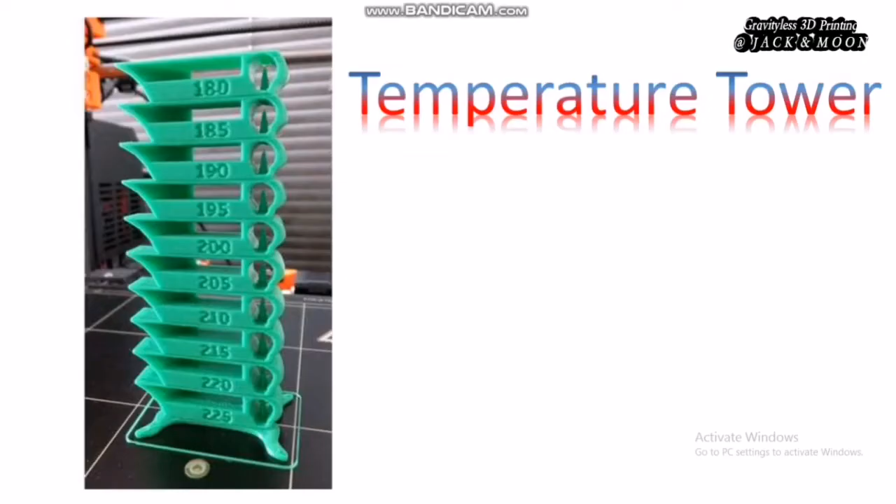In today's video, we are going to introduce this thing and show you how to print it on your own with the Cura slicer. This is a temperature tower which is designed for detecting the most suitable printing temperature for your filaments.

Normally, for every roll of filament that we bought, there will be a range of its suitable temperature written on the packaging label. Examples are PLA ranging from 190 degrees Celsius to 210 degrees Celsius and ABS ranging from 240 degrees Celsius to 270 degrees Celsius.

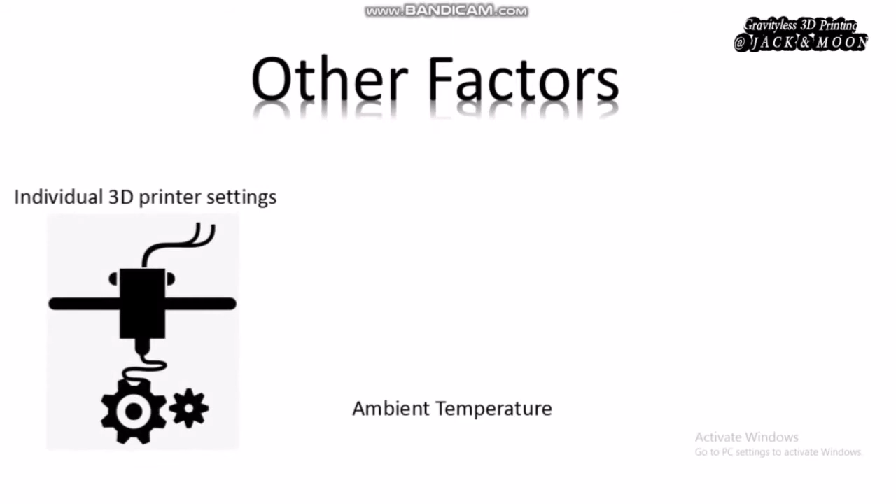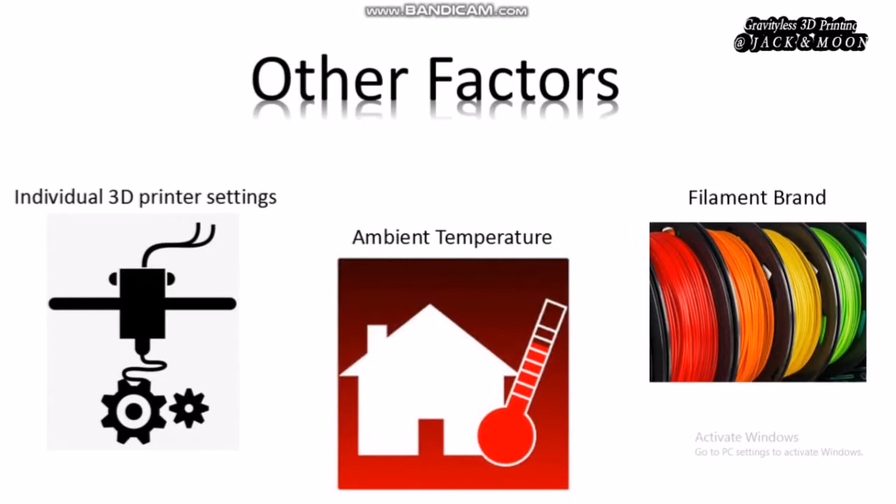Also, due to other reasons like individual 3D printer properties, environment, surroundings, and material qualities, the suitable temperature is not exactly the same for everyone. So, to find the exact value to be input to the slicer, we can use a single temperature tower for the testing instead of having to print multiple prints with different settings.

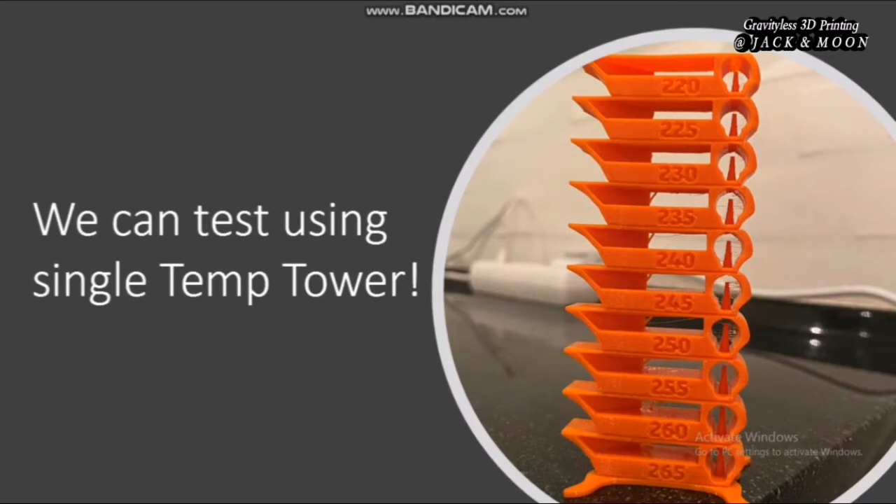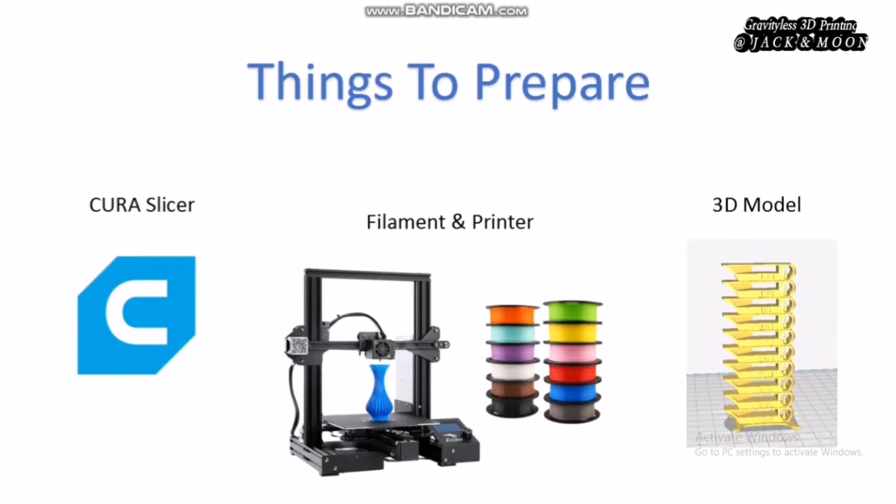Without further ado, let us look at the things you need for the testing. You will need a Cura slicer, a filament to be tested, a 3D printer, as well as the model of the temperature tower. Here, we will include the download link of the temperature tower from Thingiverse.

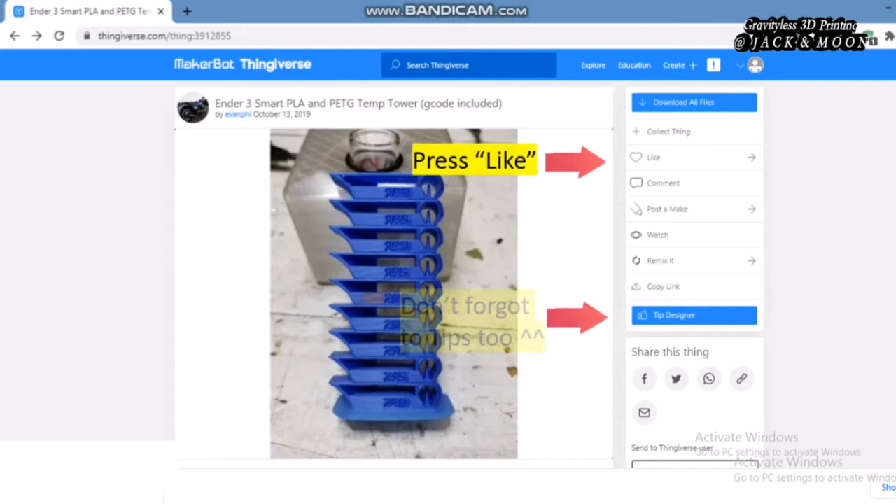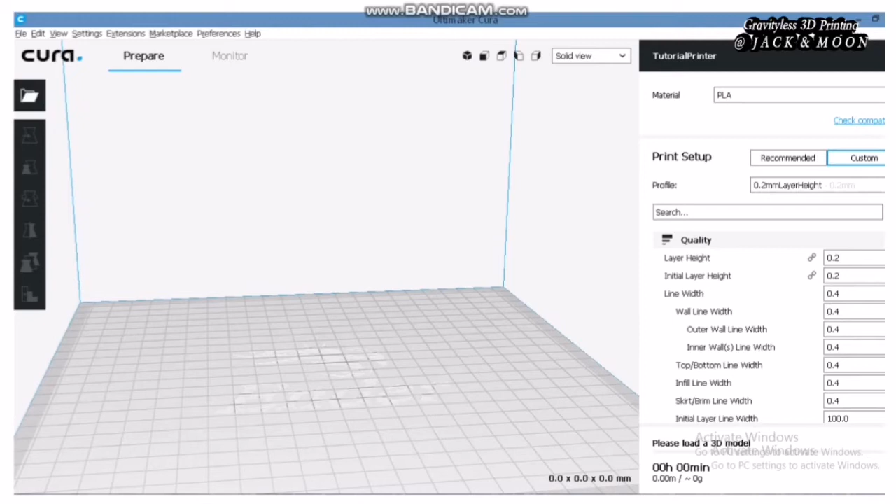After downloading and extracting the files, we will notice two G-code files which are ready to print. However, we will not suggest you use the files as they might not be suitable for every printer model. Instead, we will slice our own G-code using the STL model file provided. We will start by importing the temperature tower to the slicer.

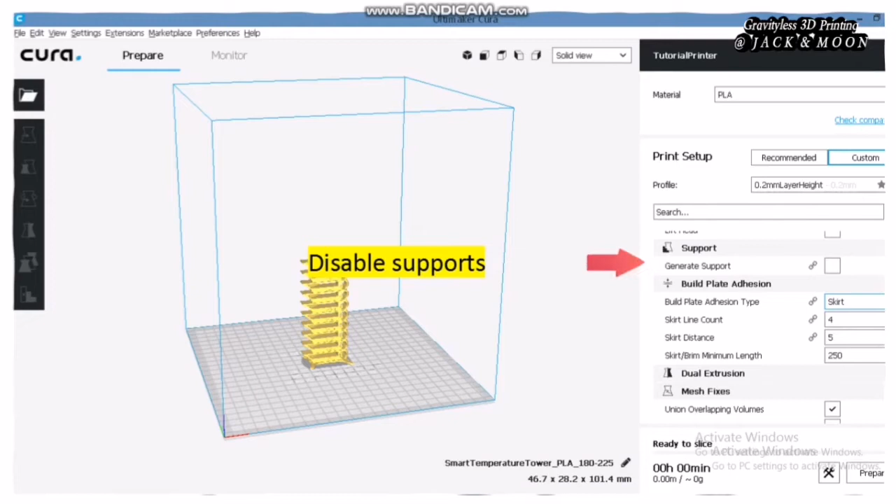First, set the layer height to 0.2 mm. Set the printing temperature to the highest of the filament's suitable temperature. Remember to disable supports and adhesion layer. Remember to turn on the fan to 100% during the entire printing.

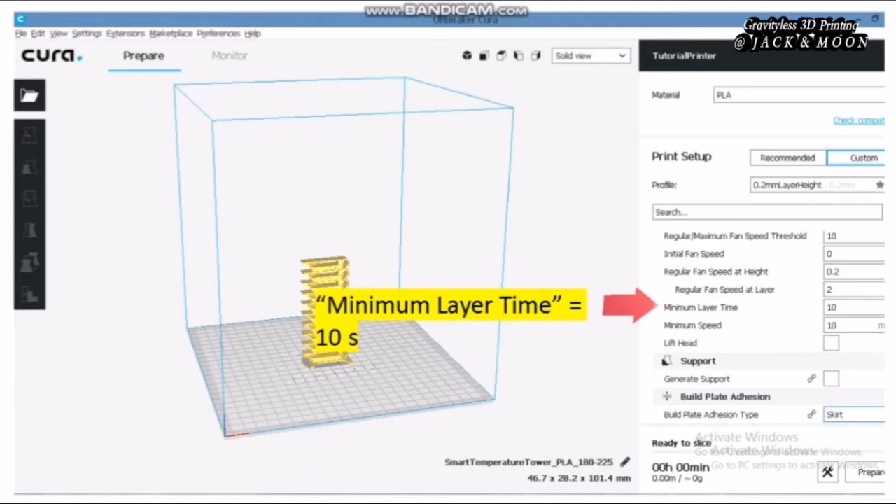Set the minimum cooling time of a layer to 10 seconds. This will prevent small printing parts from overheating and melting. The rest of the printing parameters will remain as your usual printing parameters. Once the settings are applied, slice the model and preview it layer by layer. Click View and View by Layer.

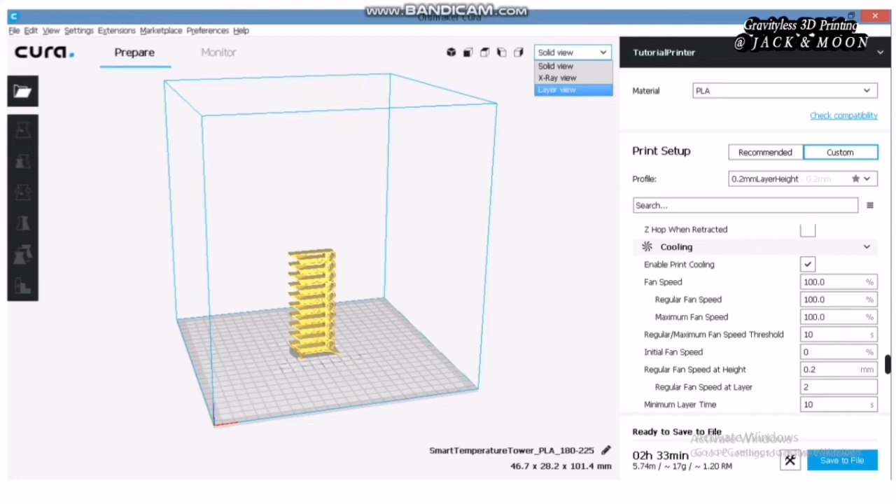We can easily detect the starting layer of each level. For this temperature tower, we observe that it has 10 temperature levels and the total number of printing layers is 508. From the preview, we know that the base of the first level starts at the 8th layer. So, we subtract it from the total layers and get 500 as the total layers for the 10 levels. We can make a simple calculation by dividing 500 by the total temperature levels. So, for each 50-layer interval, we will change the temperature according to the test.

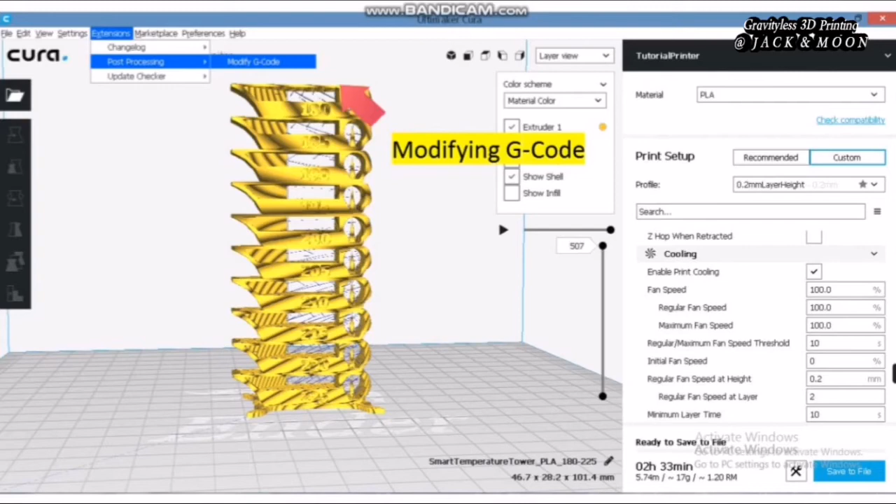Next, we will post-process the G-code to add the change temperature command. Go to Extensions, then Post-processing, and select Modify G-code. Click on Add a script and select ChangeAtZ 5.1.1 Experimental. There are a few settings that are important in the steps. Set the trigger to layer. Set change layer to the 8th, which is the base of the first level.

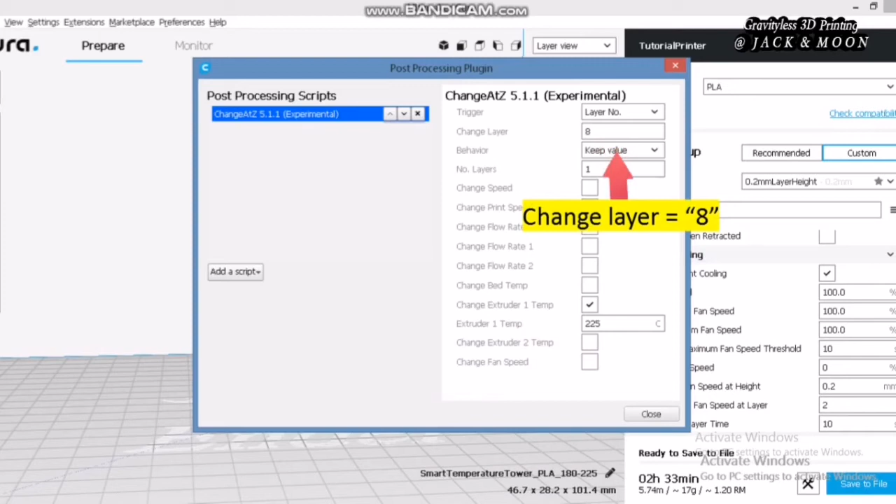Select the behavior as keep value. For the number of layers, keep it as 1 so that the effect will quickly apply within one layer. Set the change extruder 1 temp to the temperature at the layers, which is 225 degrees Celsius. Repeat the steps for the rest of the 9 levels.

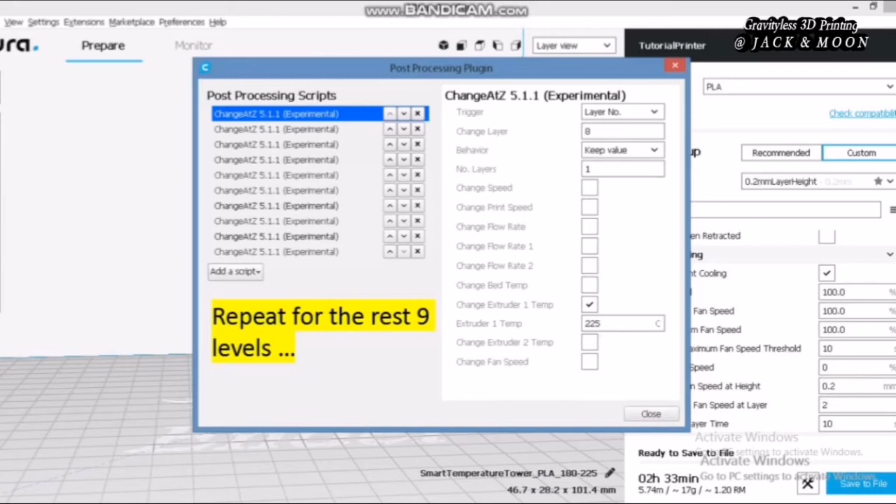This step will add the special G-code command the next time we slice this model. They basically tell the printer to change the temperature every time it reaches the layers. Remember to check those values from top down once again after the setting. Once the values are confirmed, proceed to slice the model and send the G-code to your 3D printer for printing.

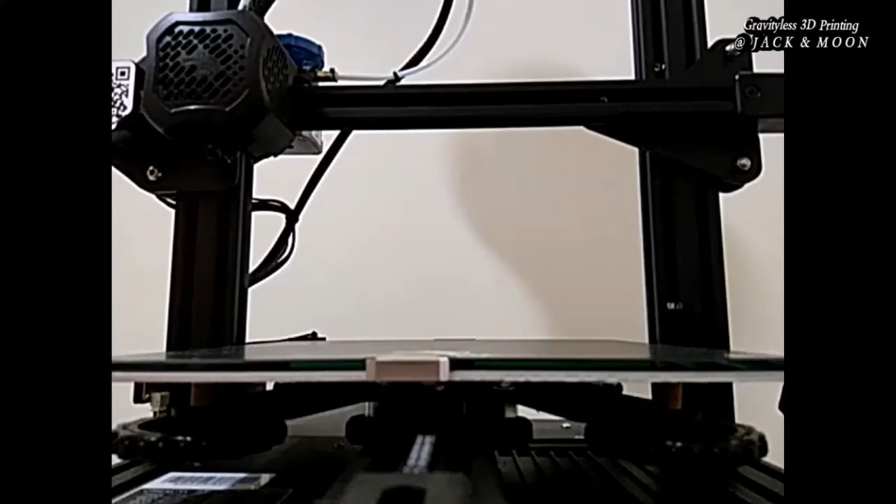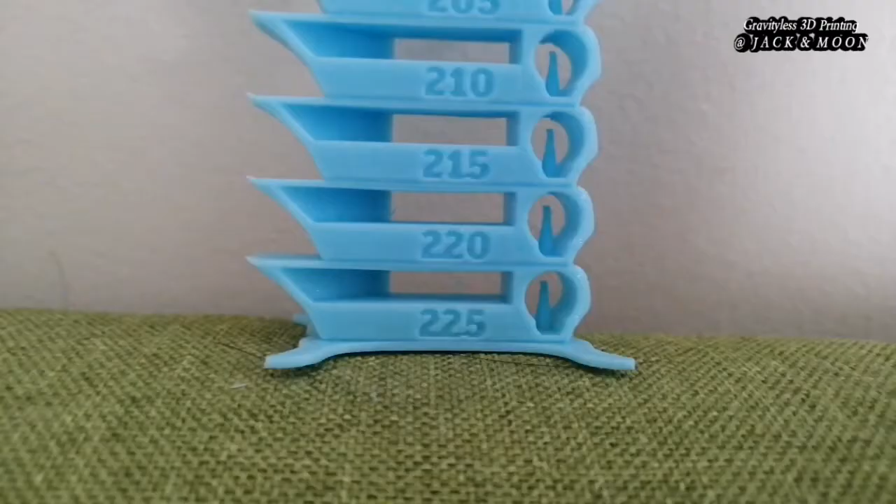Now, we have printed the temperature tower and the testing is done. Let us look at the result. For our example here, we can't notice any serious defects around 210 to 225 degrees Celsius, but we do observe weird texture at 180 degrees Celsius printing temperature. The printing starts to show some under-extrusion symptoms, probably due to insufficient heat to melt the filament at that speed.

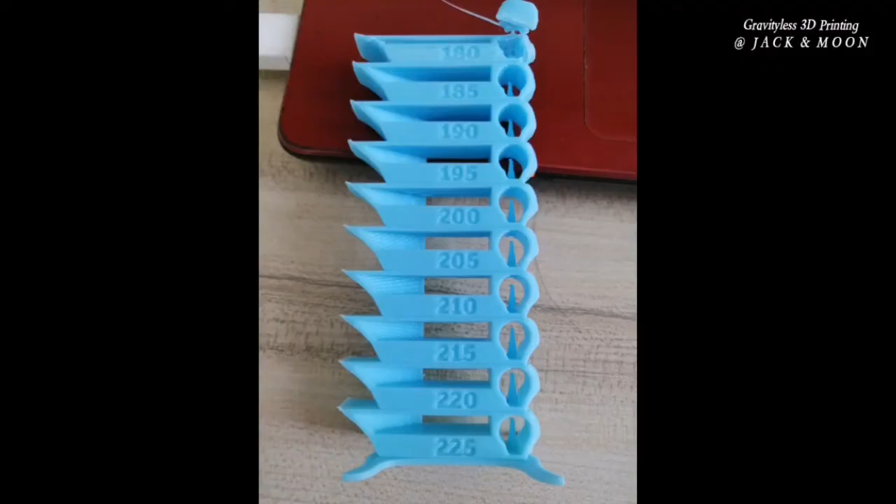From our printing, we found out that the texture and the quality of the 3D printed part is the best at 205 degrees Celsius printing temperature. So, for our future printing with this type of filament, we can stick with this printing temperature value. So, this is the end of the video on how to print a temperature tower and determine the best temperature value for your 3D printing.